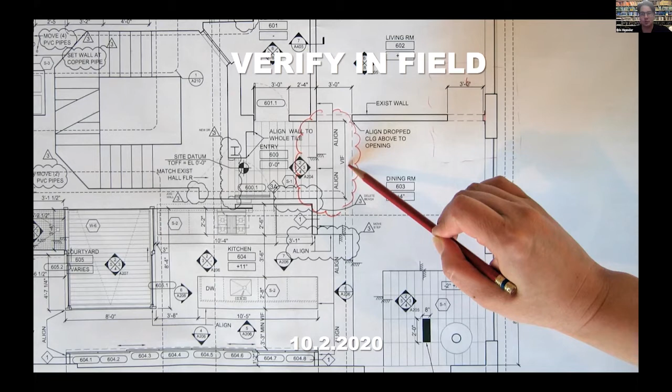So Verify in Field, or VIF, is a notational convention employed in architectural drawings, indicating that the information on the drawing is incomplete and further field measurement and verification is necessary. The note reveals a gap between design intent and built reality. The term also acknowledges our disciplinary investments in the instruments of design, drawings, models, and prototypes that are the discipline's means for operating on the world at a distance.

Verification in this case may refer to a field dimension, alignment, or survey point. It may also refer to the process of feedback, where information and expertise is fed back into the design process in ways that inflect the original design. Or, as I hope to show in this presentation, verification may include a number of other factors having to do with political and/or environmental contexts for design.

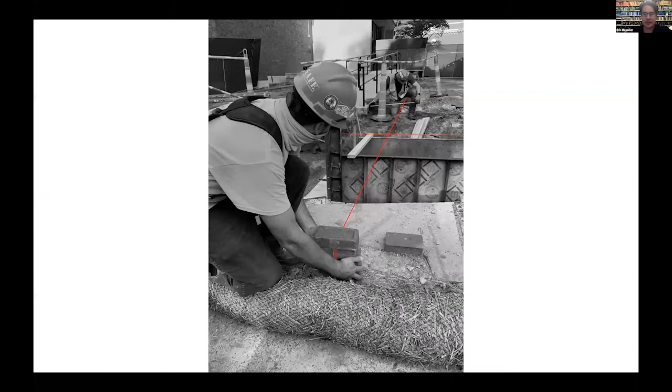The field as construction site is understood to be outside the scope of the architect. It is the space of contingencies, externalities, and uncertainties, the tolerance that Mark and others have referred to. While VIF may be understood as a disclaimer, architect's fine print, the notation speaks volumes about the discipline's and the profession's culture of risk, the role of representation, and our agency to act on the physical world. Verify in field cleaves apart the realms of conception from construction, model from building, representation from execution, and architect from builder.

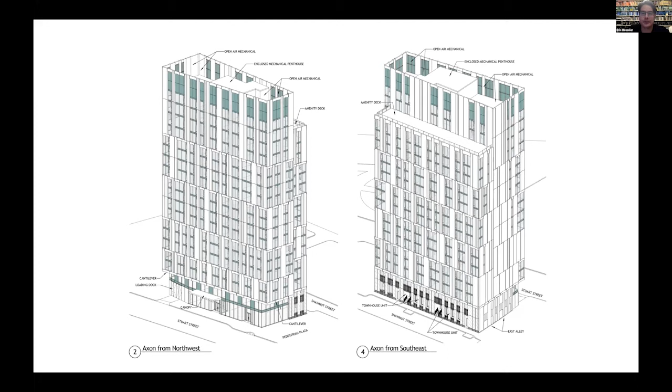Beyond a strict delineation of scope, risk, and responsibility, the separation of representation from building is significant for how we conceptualize the disciplinary practices, especially as these evolve with new technologies. We understood from Robin Evans and others, drawings precede buildings, yet contemporary drawings are not drawings at all, but vectors, information, often assembled as digital models, blocks, and data. The contemporary design workflows are altering the assumed sequence and priority and precedence, introducing new instrumentality to drawings/models as fabrication tools and challenging an inherited assumption about the hierarchy between buildings and models.

At the same time, the status of the physical building and its materials are being reassessed. Post-occupancy evaluations, life cycle analysis, and material obsolescence also question the notion of the building as the endpoint for design, and the completed building often initiates another series of models that have to do with monitoring user behavior and energy consumption. While verify in field at the most mundane level addresses the physical and contingent conditions of construction, my use of the term to frame contemporary design processes examines the term as a kind of modality, one that develops the means for more agency, responsibility, and engagement.

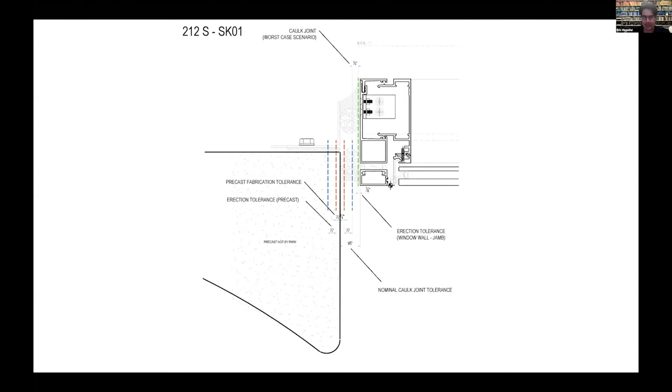Today, I want to show 3 projects through the lens of verification and field conditions. In each case, the project involves questions of fabrication and precision, erection and tolerance, and necessitates a vigorous back and forth between model and material, shop and field. The 3 projects also define field in different ways, having to do with the field of construction, the field of public engagement, and the field of environmental thinking.

So the Collier Memorial was built in response to the killing of MIT police officer Sean Collier, who was killed by the Tsarnaev brothers after the Boston Marathon bombing in 2013. In the following days, an informal memorial sprung up on MIT's campus as people sought a form of expression for their grief. In response to the marathon bombings, a campaign emerged to remain strong. Boston strong, MIT strong, Collier strong. Strength, it seemed, was the response for domestic terror.

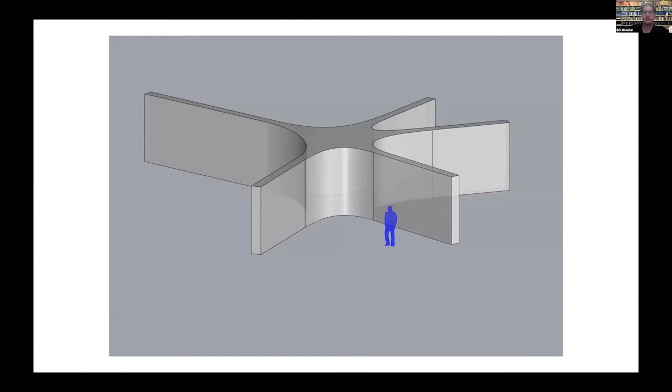We asked ourselves if strength and structure might offer clues about the appropriate response to the memorial design. Our design concept was to create a figure that would convey a conspicuous absence. We chose to carve a figure-like boulder out of the 5-fingered form. The visitor would be confronted by the missing figure whose contours were inscribed in the interface between the figure missing and the standing walls.

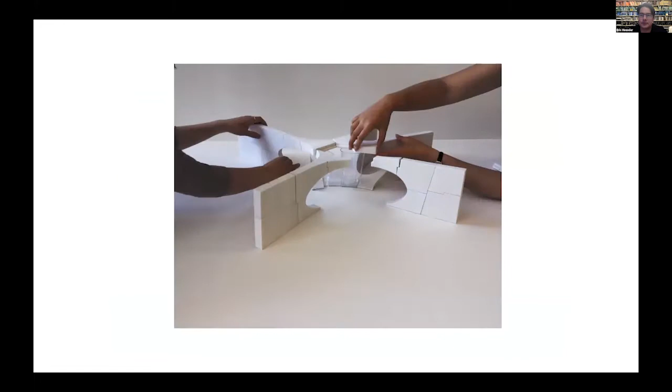Additionally, we proposed to make the figure into an arch or vault, constructed of solid stone blocks. The principle of the arch is that all blocks transfer load to adjacent blocks until they meet the ground. The challenge of building an arch with today's construction techniques introduced some complexity. No one had built a full compression arch in a long time. Discussions between our engineers and contractor worked through questions of sequence and constructability. Computer modeling by our structural engineers and masonry consultants resulted in different solutions based on different assumptions.

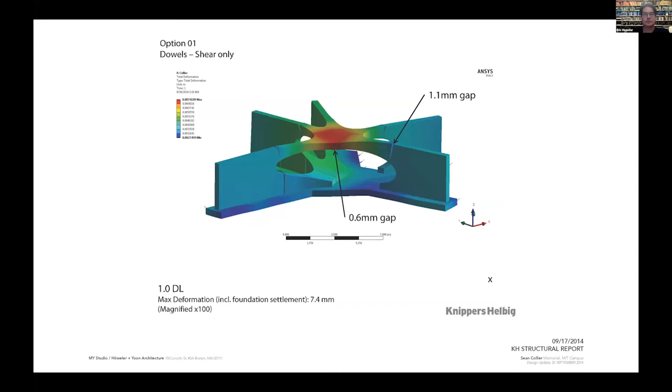They did, however, agree that the shallowness of the arch meant that the structure was very deflection sensitive. The stone blocks would need to fit together with a high degree of precision in order to stand. Small horizontal displacements would mean significant vertical displacements. That means it would fall.

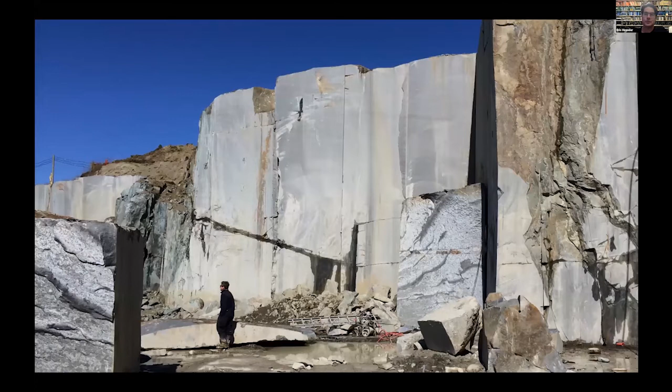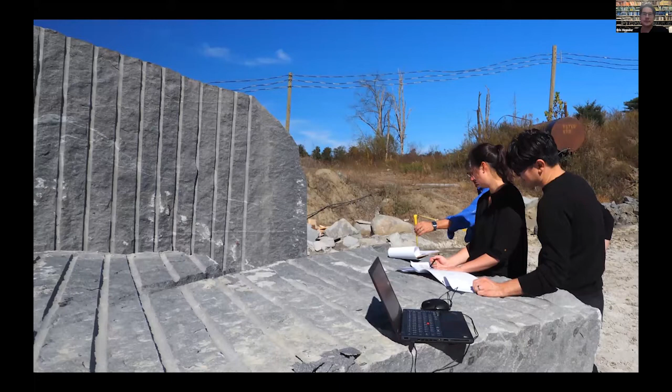The various models employed in the conception and construction of the Collier Memorial exemplify contemporary digital workflows relative to modeling, simulation, and verification. The procurement of stone required blocks larger than industry standard blocks that were optimized for slabbing kitchen counters. Searching for blocks suitable for the keystone required special procurement at the quarry and several rounds of adjustments of the block geometry to fit within the bounding box of what was quarryable and what was transportable. Verifying blocks to ensure that the expected block geometries would fit within the overall quarry blocks. We also began discussions about fabrication equipment, capabilities, and tolerances.

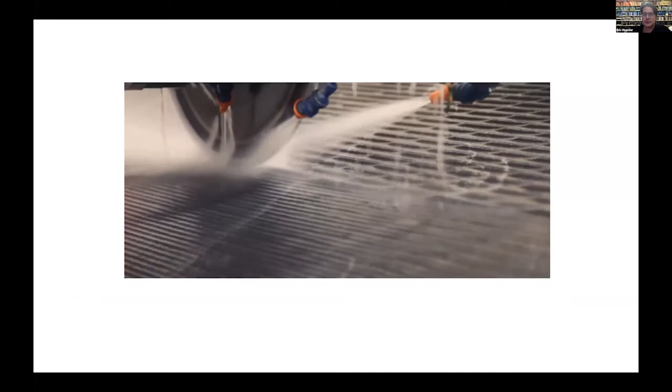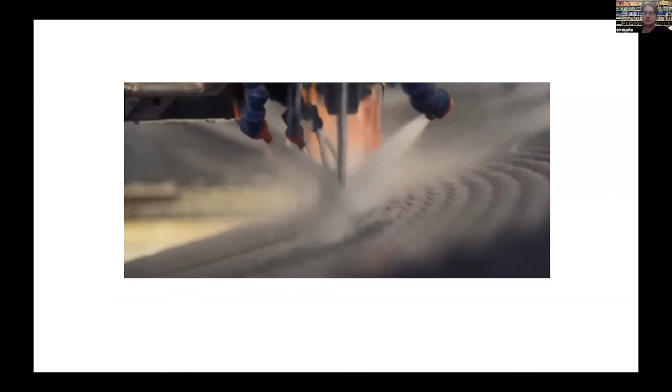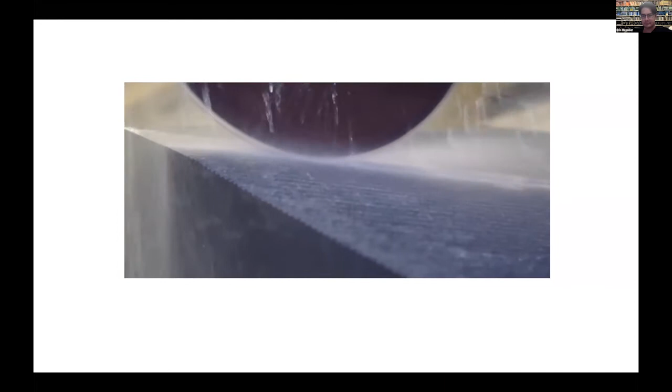The fabrication process involved translating the geometry used by the fabricator to carve the finished blocks. This involved a series of different tools, including CNC saws, multiple axis industrial robots, and the use of our 3D model for fabrication, which introduced questions of responsibility, ability, quality control. In a traditional process, the architect's drawings are design intent only. The fabricator would typically produce their own shop drawings for fabrication, and the review of the shop drawings would result in the quality control. By treating the architect's files as fabrication files, the project required rethinking the whole QA/QC process. Shop tickets for specific blocks were fabricated based on digital files, and then each block was subsequently dimensionally checked in the shop before shipping.

We tend to have a great degree of confidence in the digital tools, perhaps overconfidence. As Francesca Hughes has pointed out in her book, The Architecture of Error, our overconfidence in the digital relegates exceptions to the category of error. With every pass of the digital saw, the stone is carved away. We have a specific set of X, Y, and Z coordinates that tell us the precise dimensions of the stone, where the stone is supposed to begin and end.

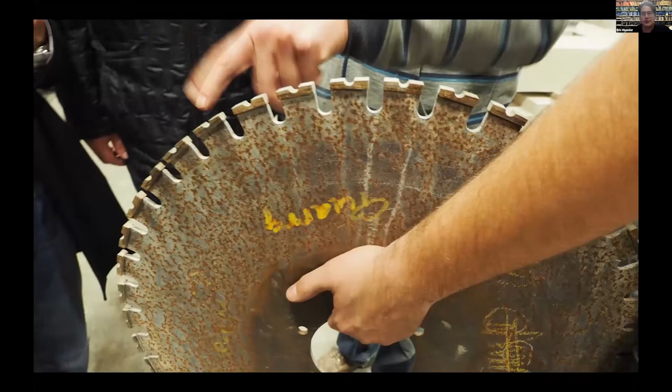While we were fabricating the memorial, the owner of the company, Quarra Stone, Jim Durham, asked us, "Where do you think the interface between the saw and the stone is? How do you know where the stone is? How do you know?" Because the saw is wearing at the same or a different rate than the stone. This question about the precise coordinates of the stone geometry is complicated because the stone and the saw are both wearing, just at different rates. The diamond tip saw is also subject to the brute processes of grinding and wearing. The stubborn materiality of the granite registers against the diameter of the saw, causing both to yield.

This was eventually addressed by performing a frequent recalibration of the saw to verify its actual dimension and then updating the toolpath appropriately. But this question of the saw diminishing really threw us for a loop, thinking that certainly a digital fabrication process would know exactly where that boundary was. The fact that that boundary was constantly shifting by millimeters as the saw blade was diminishing in size was kind of mind-blowing.

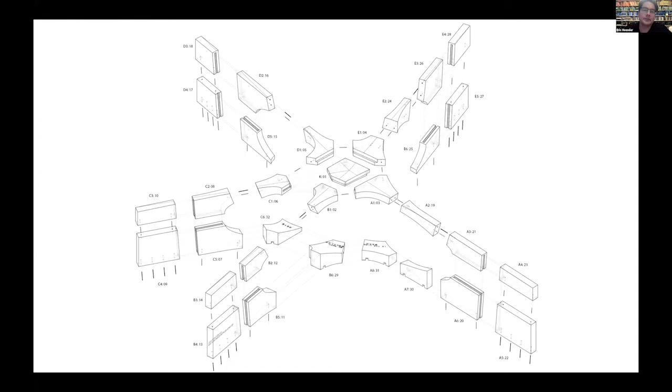During the process, we developed 32 unique blocks, each of them fitting together with this tremendous precision. We managed the blocks through these tables, managing the weight and the dimensions and the shipping. And then when they come together on site, they sit on a grade beam. So the thrust of the arch is being picked up by the tension in the grade beam.

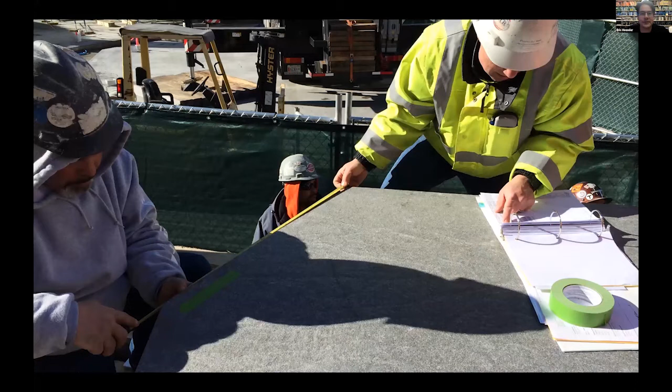As the blocks arrived on site, they were being checked. Each block was checked on the truck before it actually got off the truck. And this block shows some of the beautiful veining that we have. We picked a stone that has a charcoal background and a white kind of feathery vein. We thought that by watching and following the vein around the block, we sort of appreciate its three-dimensionality.

The traditional arches are built with scaffolding and falsework, sequencing assembly from the buttress to the center, with the keystone completing the arch. The precision required for the stones at the Collier Memorial necessitated a reverse process, starting with the keystone and working our way out so that tolerance was driven outward from center to periphery.

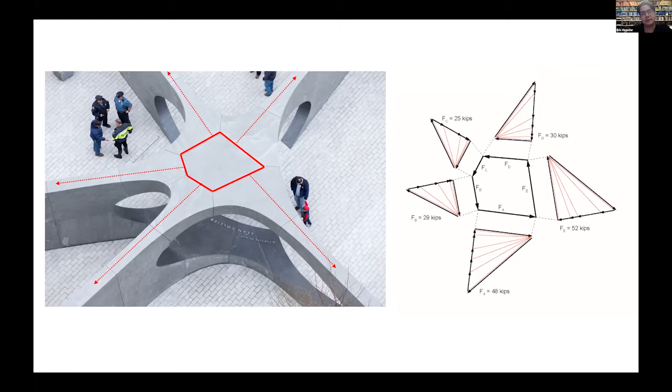The 5-sided keystone was set first, and the 5 adjacent ring stones were fitted to the keystone. And this is because the keystone had a step profile. So although it has 5 sides in plan, it has 15 faces that needed to align perfectly. The faces of the keystone are perpendicular to the thrust vectors of the buttresses. So you can read that the keystone geometry is related to the perpendiculars of these arches and those vectors. Each interface between keystone and ring stones consists of 3 faces. 15 faces come together on this one keystone.

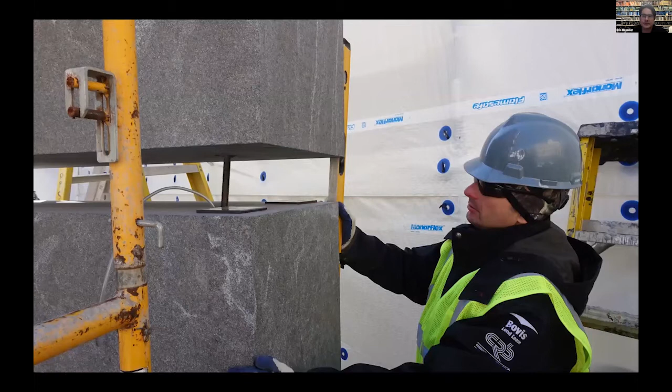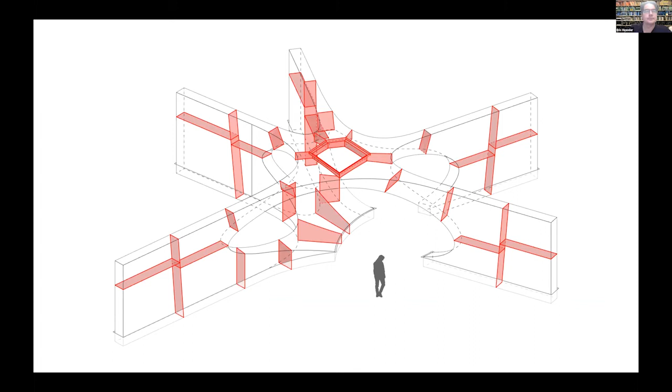The joint between the stones is only 1/4 inch wide, which does not allow a lot of room for error, either fabrication or erection tolerance. A precise fit is the only way that the arch actually works without the risk of the joint stones opening up. During the construction process, a team of researchers at MIT applied strain gauges to the joints to measure displacement. These strain gauges effectively turn the built structure into another kind of model, a verification model. The last model is the built structure itself. It serves as a means to compare the real against the analytical, and a means of validating the design after the fact.

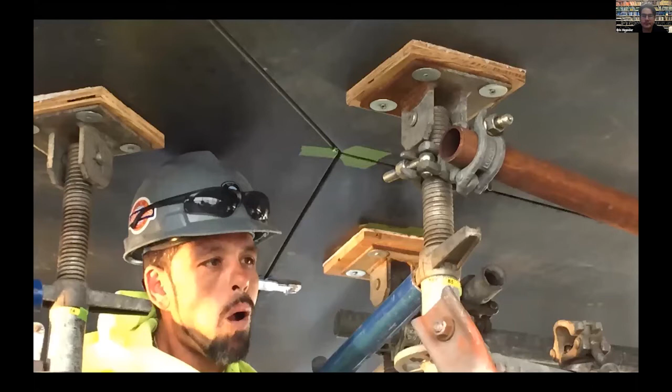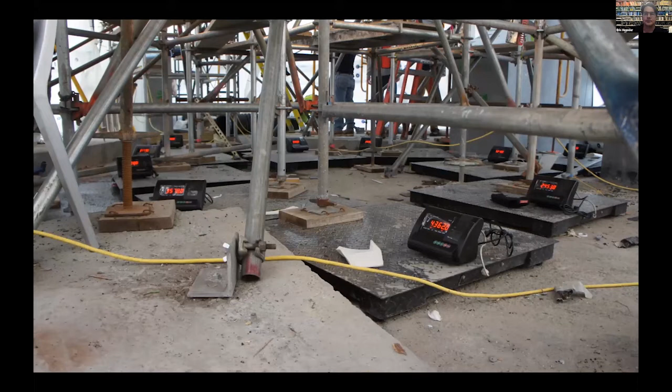In the process of lowering the scaffold, the keystone supports were lowered first. The scales installed under the scaffold allowed MIT researchers to visualize the load transfer from the keystone to the ringstones and eventually to the buttresses. It's impossible to see force traveling through material, but it is possible to measure the shifting of load from center to perimeter during the scaffold removal process. And these are the MIT researchers, who were trying to observe the shifting of weight and what they called arching action.

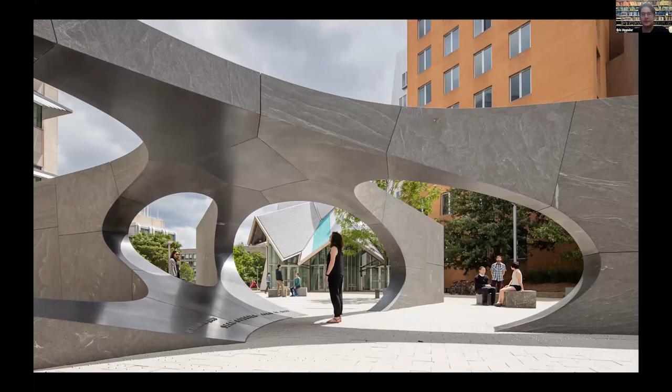The removal of scaffold revealed the vaulted figure of the void. So this is the first time we saw the void exposed without the scaffold. And once completed, we were able to appreciate the contrast between the smooth finish of the interior and the rough texture of the exterior faces. The concave figure of the conspicuous absence is distinctly legible within the memorial, and the low angle of the arch seems to span effortlessly from buttress to buttress.

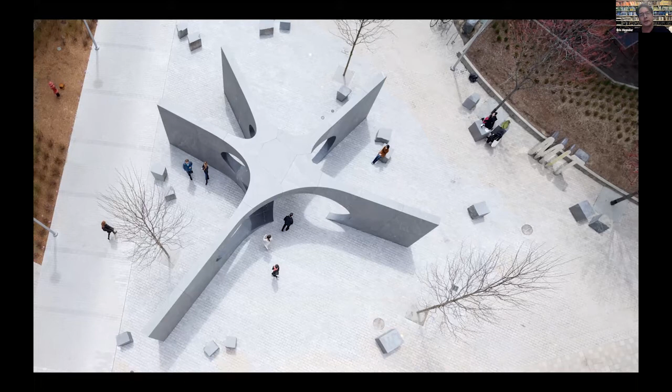A few years later, a driver on Vassar Street lost control of his car, somehow managed to avoid all the bollards and hit the buttress wall. Fortunately, it was not a fire truck, but a minivan, and the memorial survived unscathed.

So the completed memorial illustrates a contemporary design workflow where computational tools for design, analysis, and fabrication are combined in an expanded document: the digital model that combines the instruments of service with the toolpaths for fabrication and a means of post-occupancy verification. The measurement, the process of procurement, fabrication, installation, and erection are incorporated into these documents, creating feedback loops for verification, control, and assurance. So that's project number one.

Beyond the scale of building and building site, how else might we find the terms verification and field to offer insights into design where the cultural and social context are the scope and motivation for design? The memorial to enslaved laborers at UVA involved the precise fabrication and installation of massive blocks of stone, rendering it a technical artifact. Yet its impact is felt on a different register, engaging difficult institutional histories and larger questions of contemporary racism, rendering it a cultural and political artifact as well.

The University of Virginia is one of Thomas Jefferson's great achievements, and in some senses, embodies the ideals associated with American higher education as an academical village and American democracy. This statue of Jefferson installed on campus depicts Jefferson in the process of surveying the campus. Equipped with a sextant and a topographical survey, Jefferson the surveyor, the planner, and the architect is depicted as a great visionary, peering into the future to transform map into territory through the execution of his vision for the academical village.

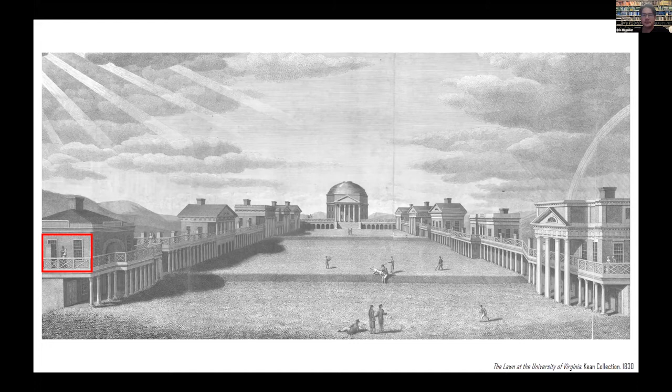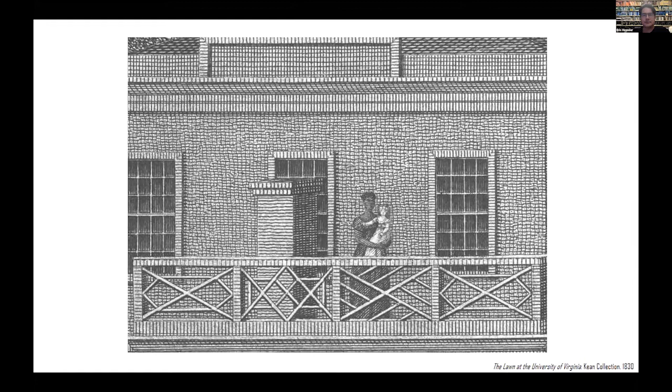The UVA grounds depicted here in this 1830 engraving show the ideal campus as designed by Jefferson, 10 classically inspired pavilions, each 2 stories tall, and a rotunda and colonnades frame the lawn. Yet the ideal society that Jefferson envisioned relied on the forced labor of African slaves. The image on the lower left corner reveals the basic structure of slavery on which Jefferson's plan relied. This blow-up of the engraving shows an African woman caring for a white child. The forced labor of slavery is hiding in plain sight, even within Jefferson's utopian archetype.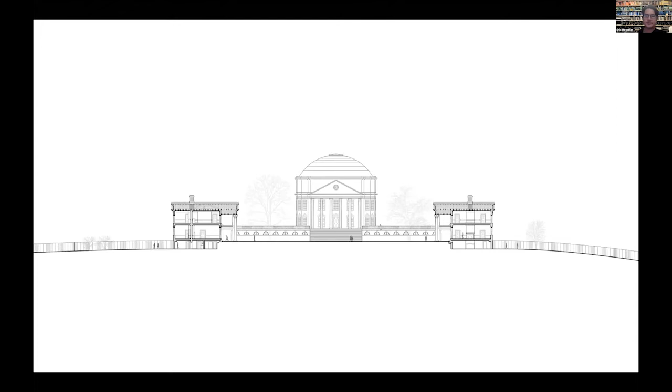In the process of designing the UVA memorial, we assembled a team of collaborators. Our team included historian and architect Mabel Wilson, community engagement specialist and UVA professor Frank Dukes, landscape architect Gregg Bleam, and visual artist Eto Otitigbe. Before the design team designed anything, we first designed a process of community engagement, spending 6 months meeting and listening to stakeholders from the university as well as to community members, many of whom were descended from the slaves that worked on the grounds. Meeting in churches and high school gyms, community centers, and classrooms, we heard a lot about the generational distrust of the university from members of the community. The grounds were referred to as the plantation.

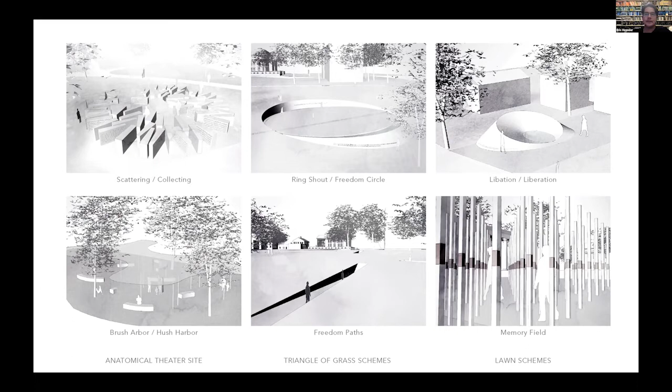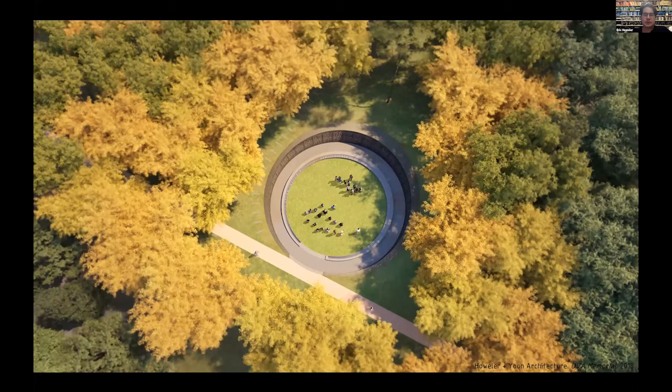We also heard that for the memorial to be legitimate, it would need to tell an unvarnished truth about the past. There was a sense that the history of slavery at the university had been covered up, and the memorial's job was to acknowledge that and to daylight that history. Studying the various proposals and multiple sites, we turned to the idea that the memorial should be a place of gathering, allowing people to gather in the present to reflect upon the past. Unlike many monuments that stand as an object in space, the memorial would be a space or a clearing intended to be occupied and completed by people. We also learned of an African dance called the ring shout, where performers sing and dance in a counterclockwise circle. With these principles in mind, we proposed a clearing and a circular figure as a place of gathering and remembrance.

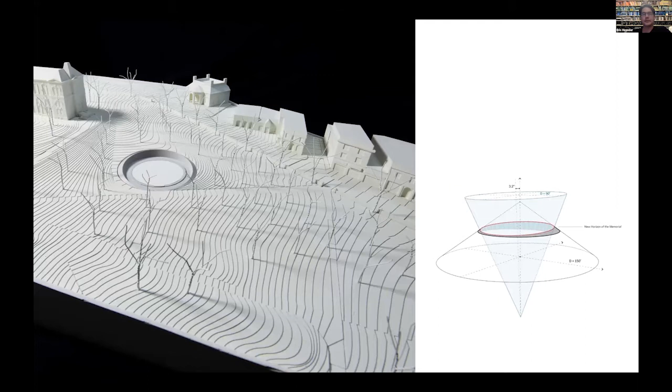The geometry of the memorial enters into dialogue with Jefferson's rotunda, where the half sphere of the rotunda's dome is complemented by a bowl-like form of the memorial. The memorial is actually made up of 2 cones intersecting slightly off axis and resulting in a tilted figure that emerges from the terrain as the center ring cuts into the ground. The memorial consists of concentric rings. The outer ring is heavily textured and references the pain and bondage of slavery. The inner ring lists the names of the enslaved. The water feature contains a timeline of the history of slavery at the university, and the middle is a pristine gathering area planted with grass. A cross-section through the high point of the memorial shows the geometry of the landform with the inclined walls and the circular path, the timeline, and the bench.

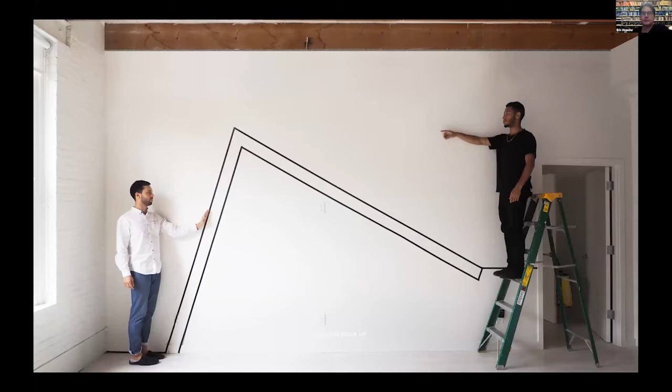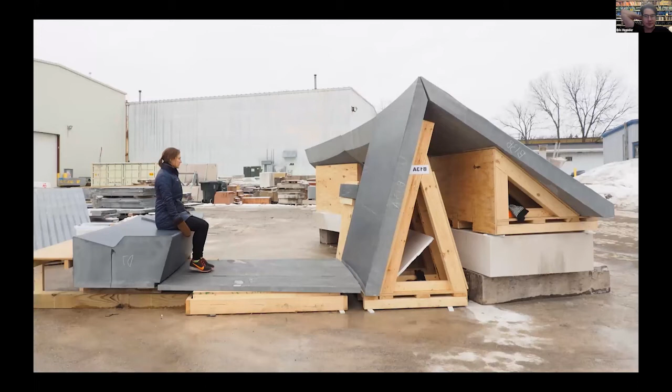A full-scale mock-up in our studio shows the geometry of the memorial relative to the body. Standing with your foot at the base of the slope of the inside wall connects your foot to your outstretched arm, thereby inscribing the body in the geometry of the memorial. A partial mock-up with the stone panels in the stone yard to verify the kind of precise geometry of the cone.

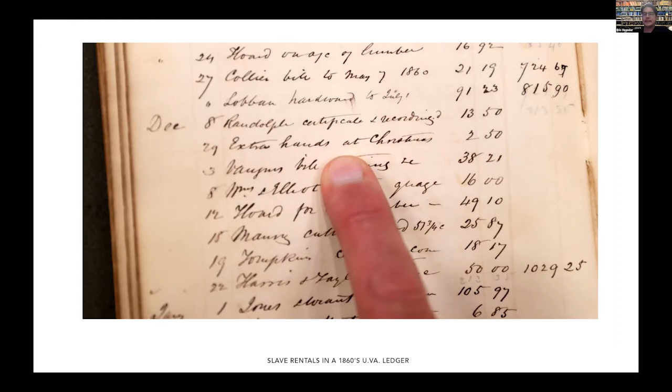The inner surface of the memorial contains the names of the enslaved. Based on the records, historians have estimated that approximately 4,000 enslaved individuals labored on UVA's grounds between 1817 and 1865. But the records are sparse. Slaves were understood as property, so the records contain logs of transactions that often lack basic information like names. Of the 4,000 enslaved, we have 963 individual records and only 652 partial names and only 6 full names.

So in translating the names of the records to the wall, we opted to inscribe 4,000 marks to act as placeholders. These underscores are kind of reserved places for the 4,000, in a way, some of them nameless individuals. They are placeholders. They represent the unknown individual. The names that are known are added to the underscores, like Isaiah and Farmer and Henry. These represent the names that are recorded, or their tasks and their crafts, or their kinship. The absence of information, the missing names, is almost as powerful as the names themselves.

This week we learned that there are 3 new names that were discovered. So we're going to add those names to the memorial. And in a way, the open-endedness of the underscore is a placeholder for adding those future names. So the hope is that we can add names in the future as scholarship uncovers new names, or as DNA research identifies new names of enslaved individuals.

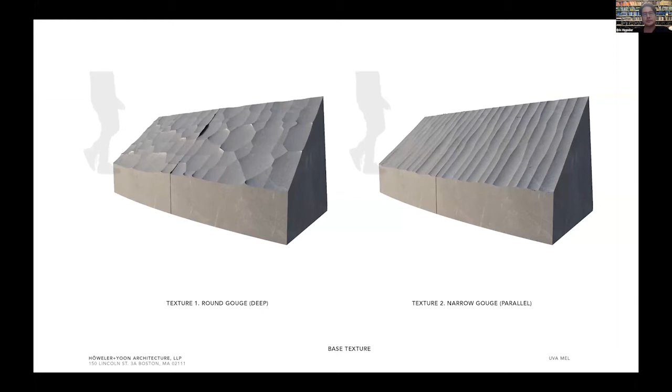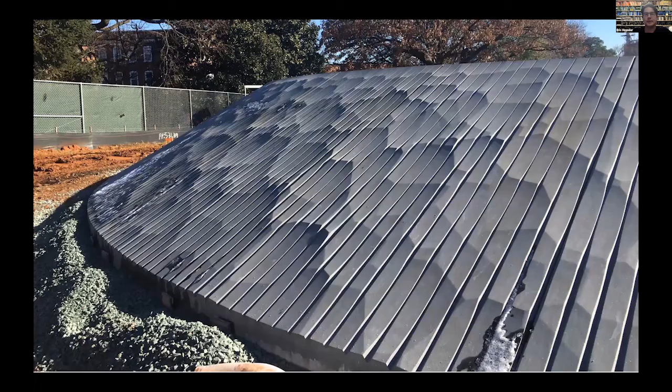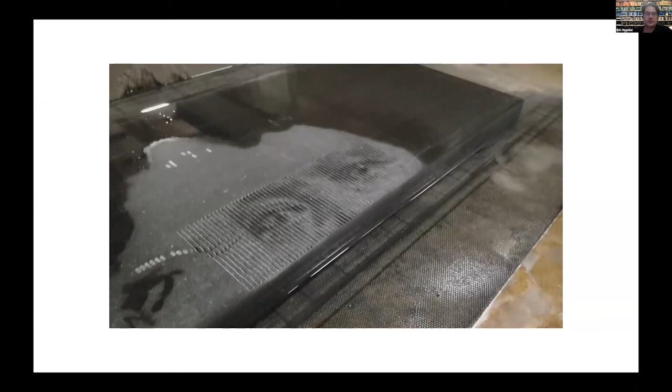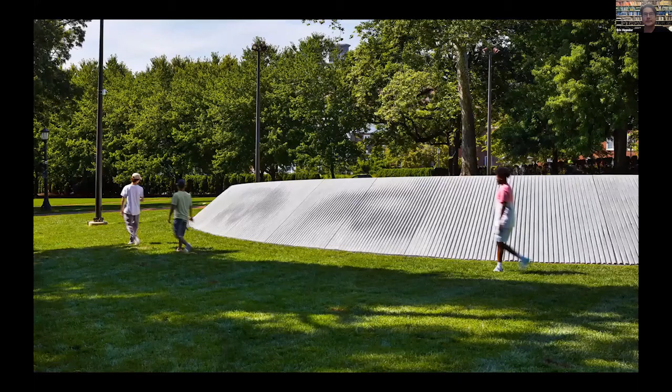You can see the cuts and the grooves are varying widths and varying depths, and that translates this raster image into a series of vector lines or tool paths that are ultimately carved on the stone. These are images of the prototypes as they're laid out in the stone yard, and you can almost see the image of Isabella Gibbons' eyes here in the middle of this center block. And as installed, you can just make out the two eyes looking from this colossal image of Isabella Gibbons.

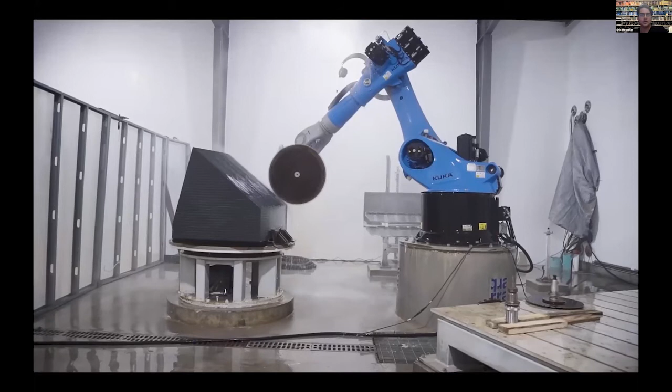The legibility of the image is highly dependent on the contrasting light as it falls on the grooves. In some cases, it's barely detectable. In that sense, the image and the representation of the enslaved is quite nuanced. Sometimes it's visible, at others it's not. This nuance was embedded in the technique of carving the stone and translating the photographic image into the contours of the stone. While the Collier Memorial depends on precision for its structural integrity, the UVA Memorial depends on precision for its legibility. Carving the raster grooves into the stone was done with this industrial robot.

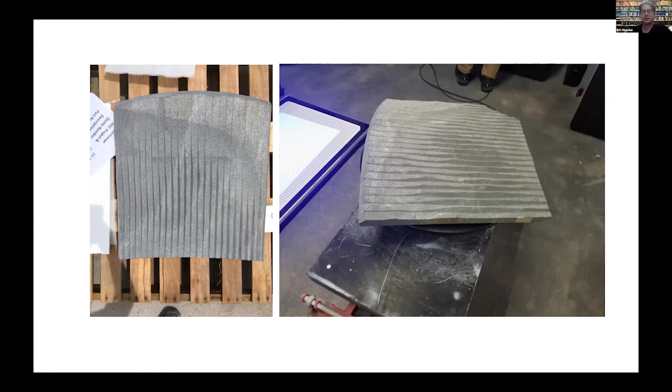Now, for the selection process for the stone fabricator, we asked 3 pre-qualified fabricators to carve a stone sample, about 3 foot by 3 foot. We provided the 3D model, they produced the tool paths. After the sample panels were produced, we hired a third party to perform a 3D scan and compare the scan to the original file. This fabricator A had a number of deviations from the 3D model, as much as 2/100ths of an inch, these red zones.

Fabricator B had fewer deviations in the 3D model, and so we awarded the job to fabricator B. As we think about precision and contemporary workflows, it requires us to rethink traditional processes of QA and QC, the checks and balances of fabrication and construction. The promise of digital fabrication does not ensure an outcome, as what looks acceptable to the naked eye may conceal deviations that are the result of a translation from model to toolpath.

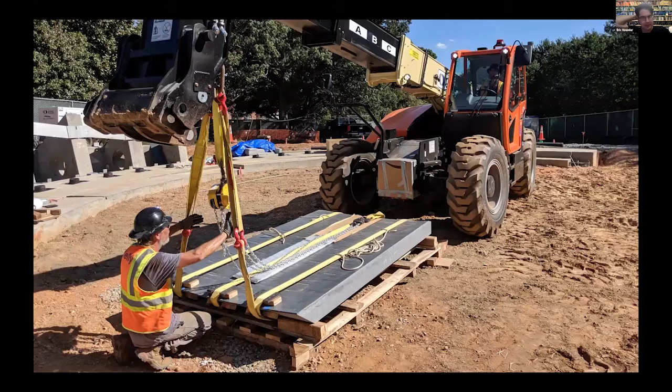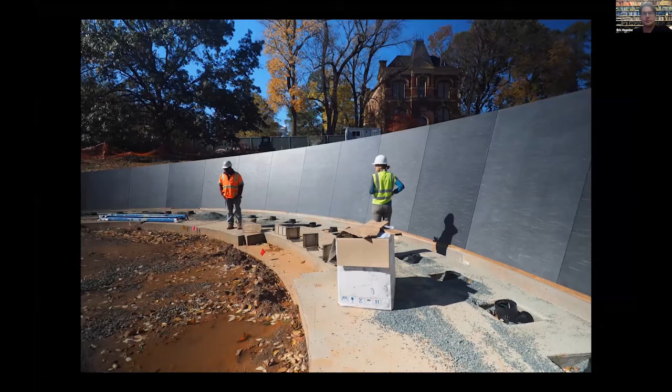Now, shifting from fabrication tolerance to erection tolerance, here we see the setting of the first stone panels in situ. Again, everything is built up in the air upon shims to be backfilled with grout after the geometry is confirmed. The challenge of architecture is of part-to-whole relations. Even as the architectural form is conceived as a monolithic ring, the implementation in the field is of multiple parts coming together to form that singular line.

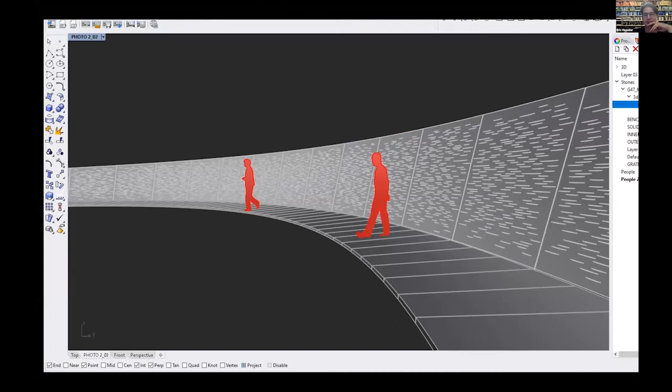The memorial relies on that ridge line to create the new horizon within which the contemplative space of the memorial is constituted. This construction photo shows the incredible continuity of that ridge line. Even though you see that the blocks are different colors, we see the continuity of that horizon as it sort of delimits the space of the interior of the memorial. It looks like something that flickered across our screens for months leading up to the construction.

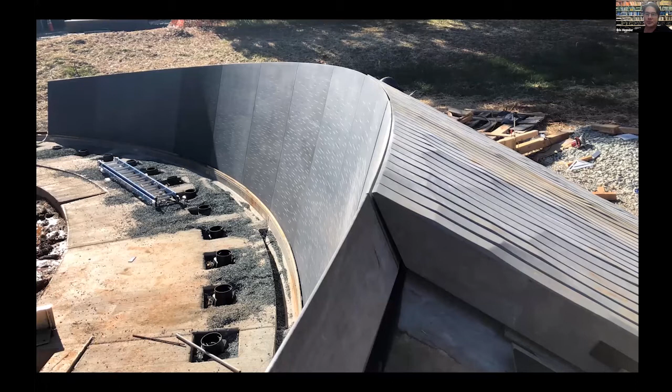The alignment of the individual pieces is additive. Most architecture is additive, yet the geometrical operation that produced it is subtractive. The Rhino operation is a Boolean difference, subtracting one geometry from the other. Yet, as I said, all architecture is made of parts, and the joint at the ridge line shows how these two panels come together, the smooth inner panels and the rough exterior panels.

And this detail shows the quirk miter where they come together, where the knife edge has been blunted to avoid breakage in the field. The gap between the two is filled with backer rod and silicone caulk. Another look at the continuous ridgeline, appearing eerily familiar, like something we saw on our computers just a few weeks before. Like you're in the presence of something that has escaped the digital and is present in the real world.

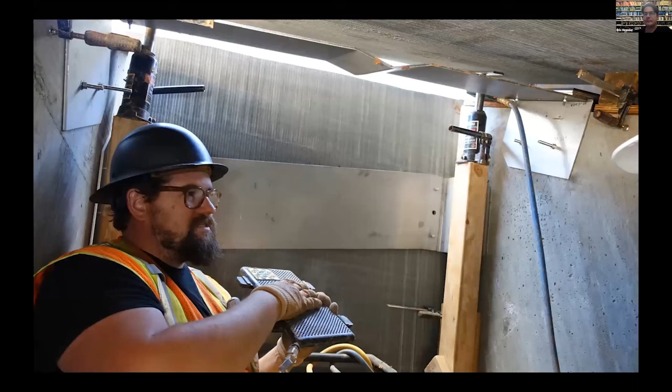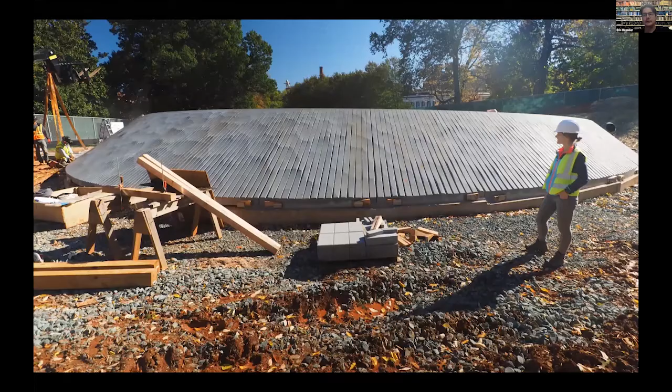How is the stone aligned to create this continuity? A number of hydraulic jacks lift the stone into position while a digital surveyor verifies the points in space confirmed with the digital model. The effect is the appearance of a monolith, even though we know it's made up of many parts perfectly aligned. Here in the center, we see a 1/4-inch joint located at the center of the groove.

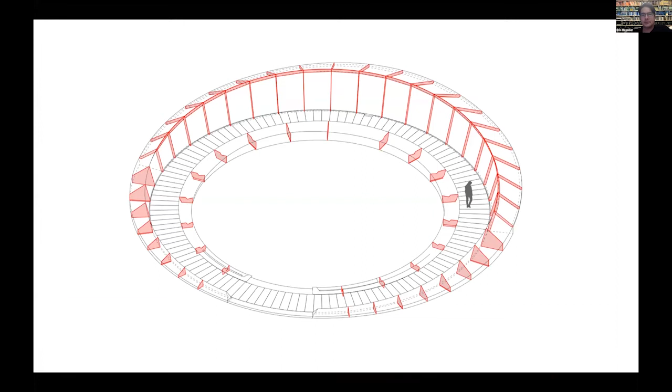And the memorial does allow the viewer to measure their body against its geometries. The water feature contains a timeline of events documenting the history of slavery at the university. The views from the exterior highlight the landform-like qualities, the contrast, the smooth interior, and the rough exterior. And recall the traces of the digital, casting shadows in the real.

The construction of the UVA memorial involved high degrees of precision and processes of testing, measuring, validating, and verifying. It also unearthed painful histories. But the completed memorial has been embraced by many in the community, and UVA has acknowledged that the impact of the memorial is the rebuilding of a trust with the community. The field of work, in this case, is bound up in the history of the processes of recognition and reconciliation.

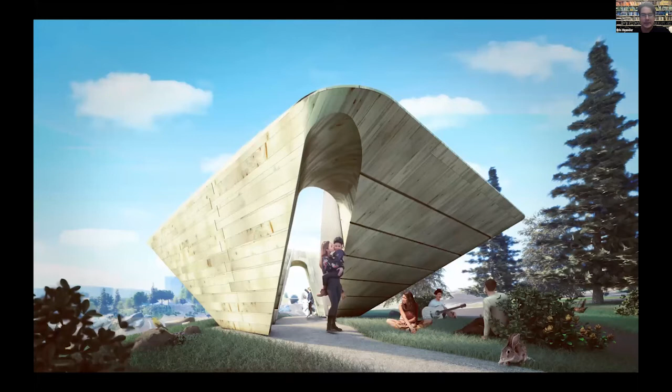So I'm going to shift to the last project here. As we expand our understanding of design to include the broader context in which we're working, the labor that has gone into their assembly and communities that they impact, and the environment that they become a part of, it is useful to think about building as noun as well as verb. The process of building involves flows of material and labor, energy and waste. The building itself, the noun, is just a moment in a much larger process.

Kiel Moe has described the physical building as an isolated object instance within a much larger network of linkages, processes, and flows of material and labor. The last project I'm going to show is an inhabitable sculpture located in Spokane, Washington, on the site of the former 1974 World's Fair Expo.

In this case, the structure is conceived of as an instrument for looking, for surveying the site. The diagonal cut through the sculpture creates a sightline relationship across the landscape to another sculpture. You can just see another sculpture through this aperture right here.

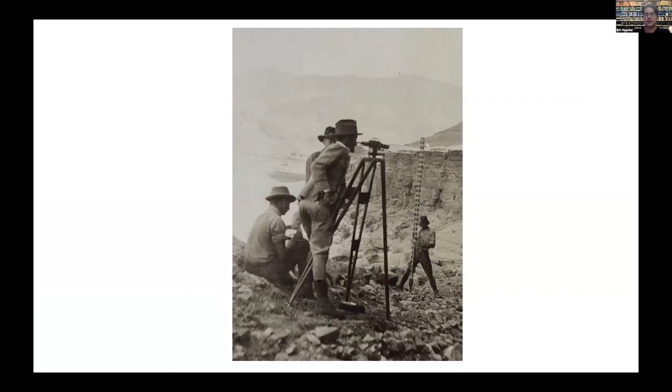The figure of the surveyor sighting across the landscape became part of the concept for this project. The site itself is quite dramatic, with gorges and waterfalls that historically were part of the Spokane tribe's hunting and fishing grounds, and eventually became part of the development of Spokane's mill and hydroelectric power industries. Our initial studies showed alignments across the site's topography and the potential for multiple pavilions to be sited relative to each other.

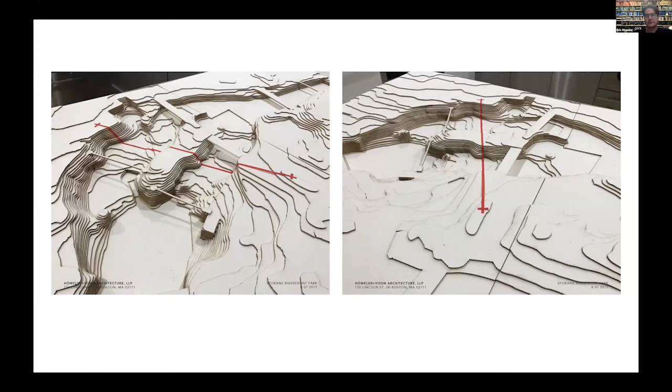The history of logging in the Pacific Northwest is also something we wanted to call attention to: the use of wood as a basic raw material that was associated with the place. Evaluating the environmental aspects of building today requires that we take into account energy performance as well as material embodied energy footprints. And as architects, the agency in specifying material or a system is actually one of the most significant decisions we make in the design of buildings.

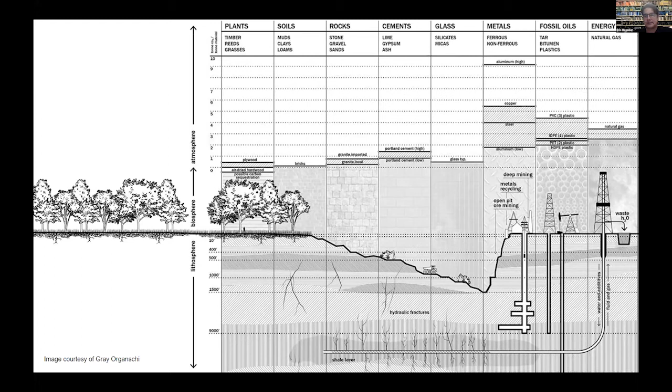By specifying wood as a construction material and substituting for steel and concrete, we're choosing to avoid energy expenditures of high energy practices of extraction and processing. Building with renewable materials such as mass timber has benefits including carbon sequestration and impacts on land uses and forestry practices. As part of our research into mass timber as a building system, we proposed Stepwell as a public art installation in Spokane with a stacked mass timber structure.

Understood as a device for looking, the Stepwell project gestures beyond itself with the diagonal sightline that bisects the plan, and a lookout platform at both ends of the structure. The exterior is sloped to accentuate its cantilevered form. The interior profile is terraced for seating. The non-parallel faces of the interior and exterior suggest a use of material as a volume, no longer composed of beams and planes.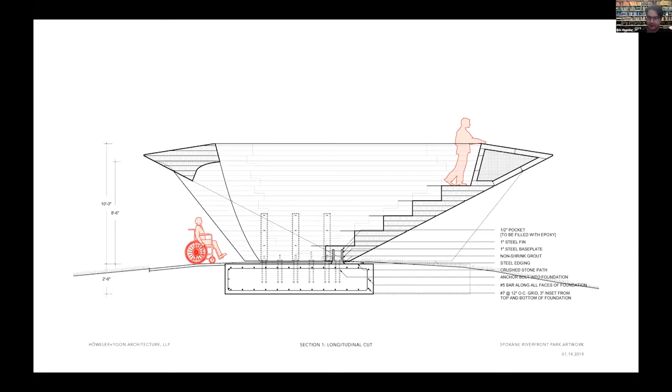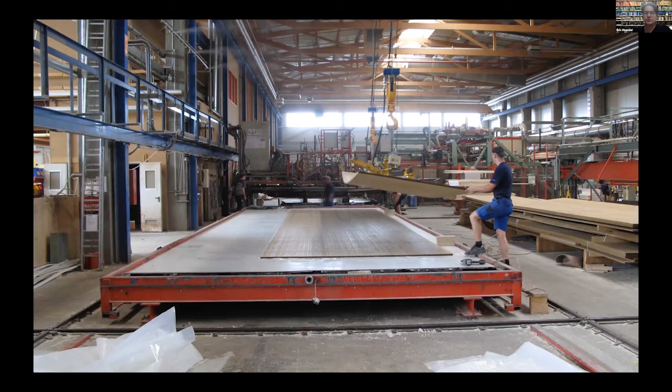The mass timber industry is evolving to scale up beyond the traditional wood workshop and embrace the scale of engineered lumber well beyond the dimensions of wood sources, namely the size of a trunk. Engineered wood takes advantage of glues and composites which reconfigure wood to improve yields and optimize components of varying qualities. However, the mass timber industry is primarily focused on cutting flat sheets and beams, relying on cutting sheets in planar configurations perpendicular to the surface.

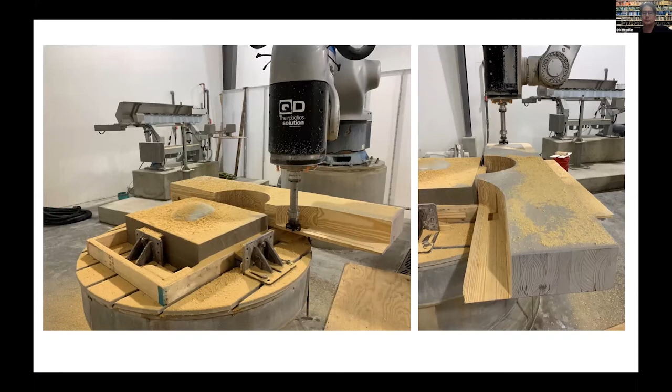Yet the multi-axis industrial robot is capable of a far more three-dimensional work envelope, which allows it to cut volumetric elements like blocks of stone. For the Stepwell project, we began testing the work envelope of a robotic mill to be truly massive mass timber elements. Rather than substituting conventional building elements with alternative materials, we opted to conceive of a structure that was inherently volumetric and use the mass of the mass timber to implement it.

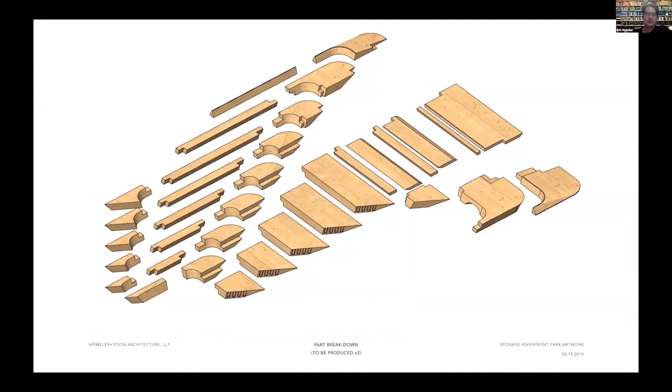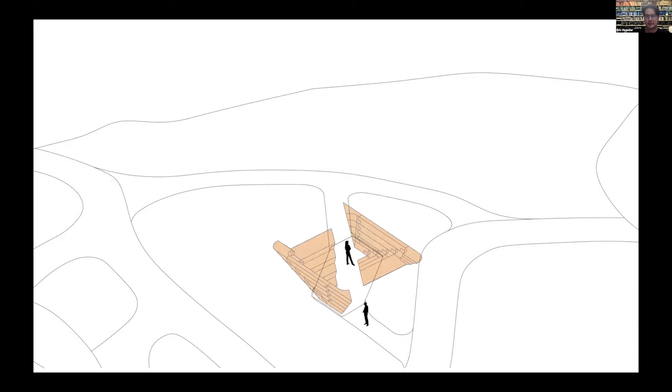The Stepwell consists of 70 blocks of stacked glue-laminated tiers of Alaskan yellow cedar. Components are fabricated in the shop as volumetric blocks and transported to the site and erected in large pieces. Maximizing the size of the blocks reduces the field labor and relies on the precision of a shop fabrication environment. It also limits time on site, and time also translates into error. Optimization involves making repeating blocks that stack to produce a Stepwell geometry. And the erection sequence shows the process of assembling large volumetric parts to form the singular whole.

It's also symmetrical, by the way, Alejandro.

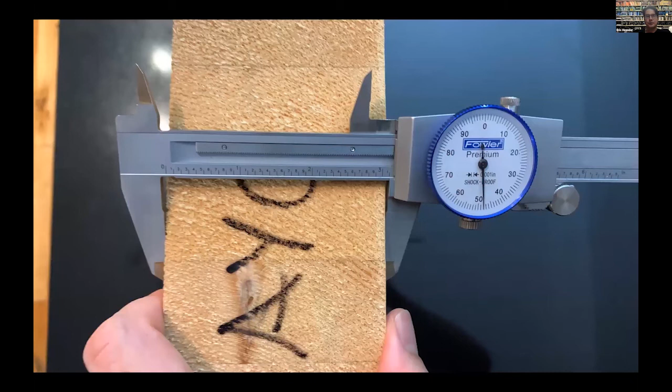Okay, each species of wood has unique properties, including grain character, pest resistance, weathering characteristics, and expansion due to moisture content. Alaskan yellow cedar was selected in part because of its weathering characteristics. It's expected to weather into a silvery gray. Like all works of architecture, construction involves assembling discrete parts into a singular whole. How those parts fit together is key, as every joint is an interface of force, alignment, expansion, and contraction. Minimizing joints allows for more control, less field contingency.

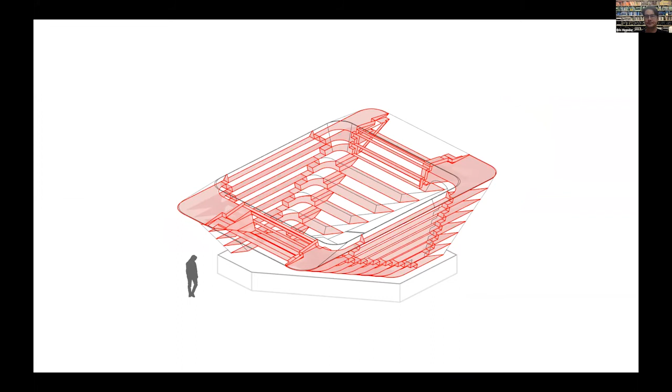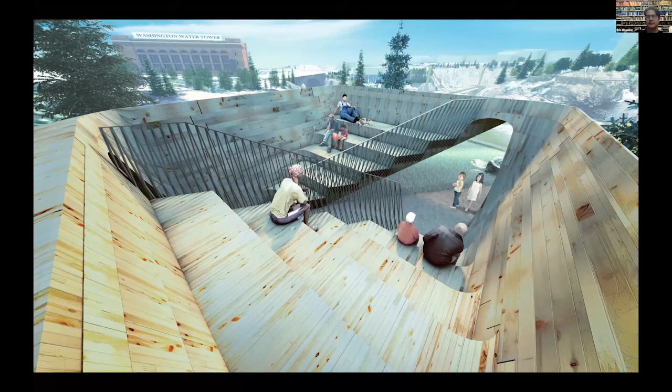The structure produces a monolithic interior, scaled to the body and to its ergonomic proportions, that has a distinct form on its exterior appearance. By constructing the sculpture out of solid blocks of timber, we sought to create a unique structure, one that recalls the material history of the place, as well as one that speculates on new uses for mass timber products. The volumetric mass of the mass timber form, steps and walls of the Stepwell project suggest monolithic construction, more akin to masonry construction. The blocks of mass timber resemble the corbelling in stone.

The volumetric use of mass timber learns from the use of volumetric stone from the Collier Memorial and the UVA Memorial, where the fabrication envelope of the robotic mill is employed to arrive at a solution that is inherently volumetric. Stepwell is understood as a stereotomic mass that produces spatial and structural configurations that are analogous to vaults and shells rather than frames and skins. The use of mass timber in a truly massive way reveals a new expressive potential for engineered wood, not simply as a substitute for steel and concrete, but as an alternative to previous construction modes of what Elisa Iturbe would call carbon modernity.

To find alternatives to carbon form requires prototyping new modes of carbon sequestering, rapidly renewable building materials that offer new possibilities. An accounting of the embodied energies of projects like Stepwell offers alternative material flows and energy footprints. Thinking through material, its qualities and quantities, procurement and processes allows us to imagine an approach to building with the earth in mind, what Bruno Latour would call an earthly account of building, or an architecture of accountability.

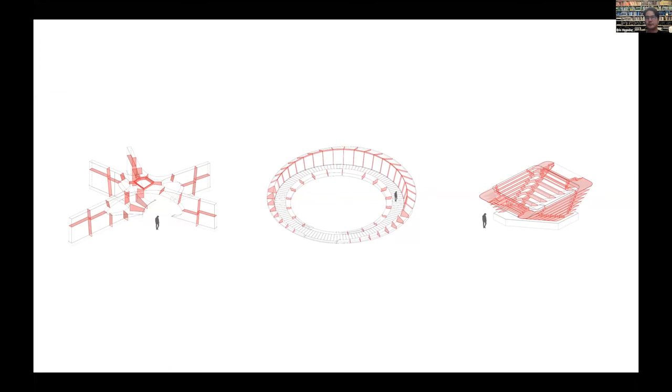So the translation from drawing to building, from concept to construction, is never a linear process. Despite our digital tools and digital fabrication techniques, in construction, there's ample room for friction, gaps for tolerance and deflection, anticipated and unanticipated conditions that require the feedback implicit in the verify in field notation.

In each case, field conditions, constraints, motivations, and materials are different, but the strategies for working back and forth across the boundaries of conception and construction, between design intent and means and methods, community and climate, have been instrumental. Strategies for verification, integration, and tolerance become drivers for design, where materials and methods, engagement, and environment impress themselves on the apparent seamlessness of our digital design process.

Contemporary use of digital tools, whether 3D modeling or cutting stone with a robotic saw, are all working through media. In our own work, we have shifted from arguing for an expanded field, including media as material, to contemplating the status of material after media. The Cold War quip of trust but verify, attributed to Ronald Reagan in the context of the Cold War détente, contains a fairly direct assertion that truth could be verified. There were or were not missiles in the silos.

Writing in 2020, weeks from the election, it seems that the common understanding of a shared reality, a shared understanding of truth, and the articulation of common values seems more and more remote. The paradox is, the age of post-truth coincides with the information age, the age of big data, and of peak knowledge. Yet the need for verification, for systems of feedback and techniques of translation has never seemed more urgent.

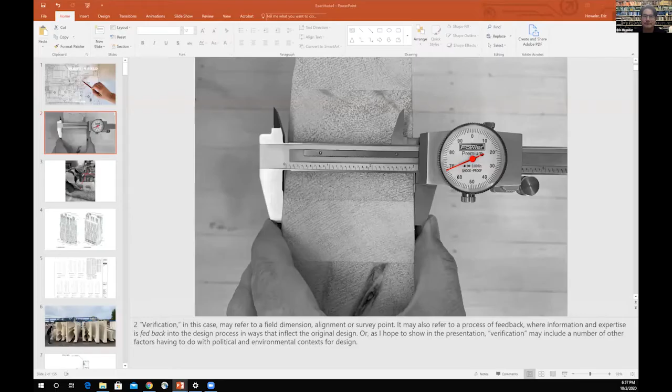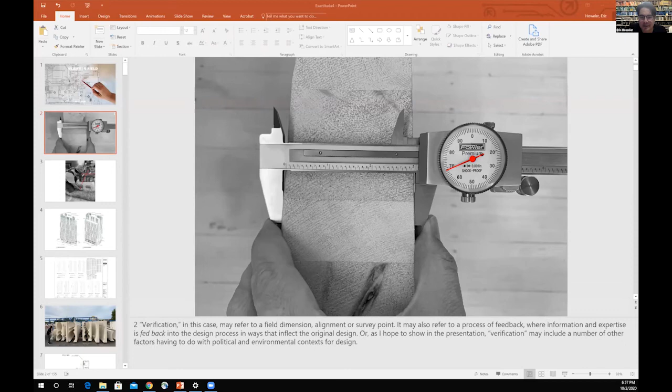Okay. Did I stop sharing my screen? Yes, please do. Okay. I'm not sure how. I stopped it. There you go. Great. Thank you. Michael, I think you're muted. Oh, it seems that Michael is, for some reason, not connected. So we'll see. We don't have questions yet, but I'm going to ask you a question. So in terms of process. I'm back. Okay. You're back. Okay, go ahead. No, your question first. Harry, please go ahead. No, it's okay. You're the chair of the session.

Go ahead. Okay. I wondered if you could talk about, of course, the Collier Memorial struck me as, they've been building arches a long time. There would be no Gothic architecture without arches. And I wondered if you could talk about the sort of conversation between the size of the blocks and the technology. Was it the existence of a certain kind of foundation of technology that permitted the use of large blocks, or did the size of the block push the existing technology into a new space of fabrication?